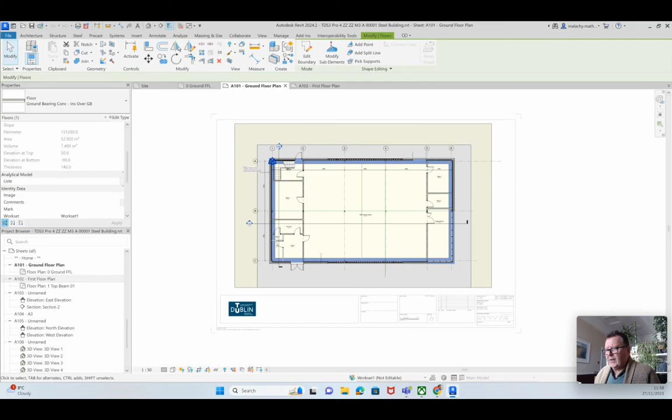Now, you can see I've got strange colors there, so I'm going to activate this view and pick one of my concrete floors and the screed element here. I'm just going to make it white. Right, that stands out a little bit better.

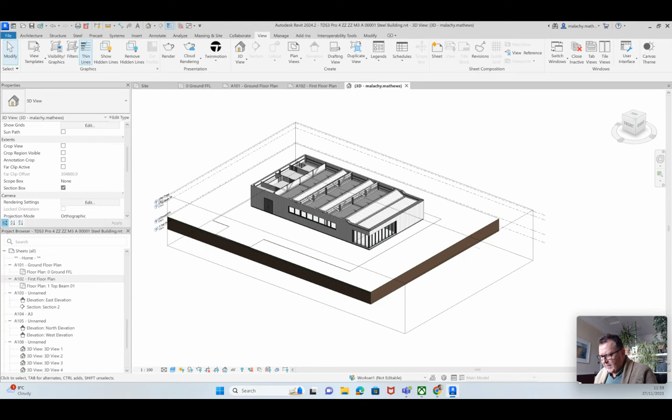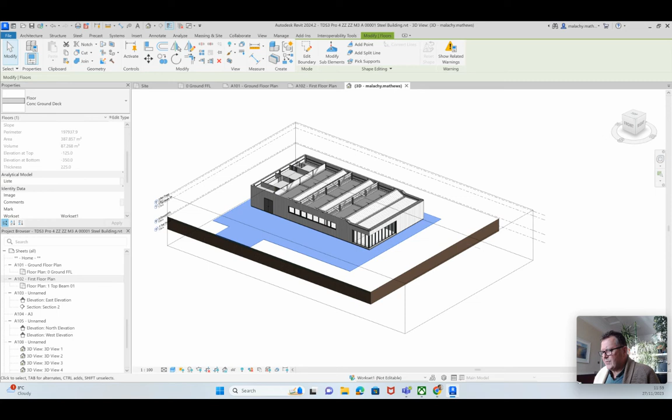If I go into 3D, you'll see that - and I'm not quite sure whether you're getting a site plan or something to work on, so I've just made a very simple topo solid here. When I create my topo solid, I've got 300 grass, 200, and 2 meters of earth below that, and you get something like this. Then this is just literally a ground floor deck, a path and driveway in, just to mark the front entrance. That's the only reason I'm doing that.

So I'm back to my ground floor plan, that's what you're seeing there. Now you'll have this populated with notes and everything else that goes in there. So I'm going to deactivate that view.

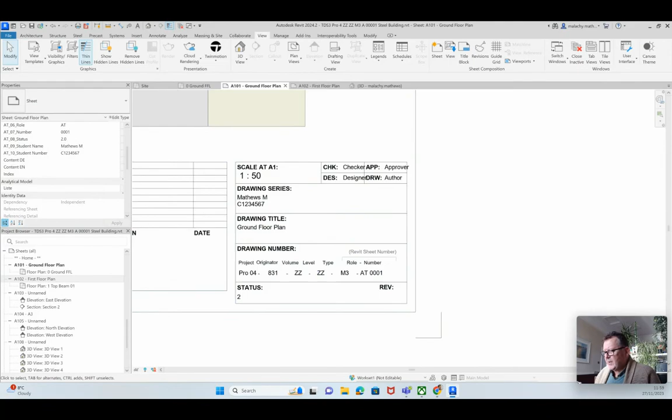Okay, and I'm down to my title block down here. You can see I've got this filled out, and what I'm going to do is go into the ground floor, first floor plan here, and fill this out down here. You don't need to click anything in here - everything you want is filled out via the parameters here.

The advantage is once you do this once, you can just hit the drop-down box and populate these very quickly, because you'll be doing each sheet. So if it's project 4, put in project 4; if it's project 5, put in project 5. 831 is TU 831. ZZ is a standard ISO 19650 designation to say there's only one volume and only one level as such, so I'm just using ZZ.

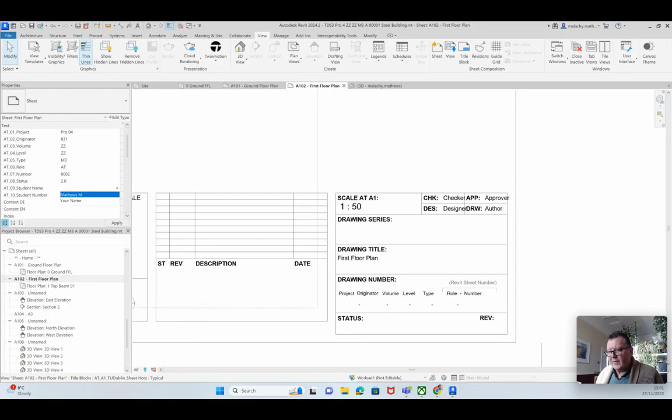M3 is the code for a 3D model. The role is AT. The number in this case is going to be sequential, so this will be number 2. The status is 2. Then you'll fill out your name and student number and hit apply - bang, that's all filled out there for you.

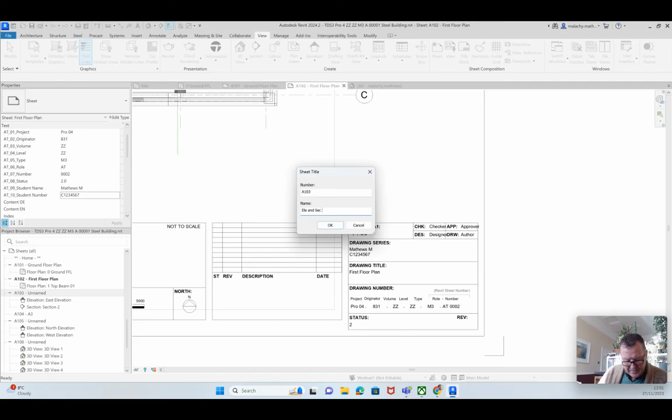So here, if you need to - see this unnamed one there - I'm going to rename that, and that's how I do it. I go in like that, so it's 103, and this is Ele and Sec 2. And then there it is.

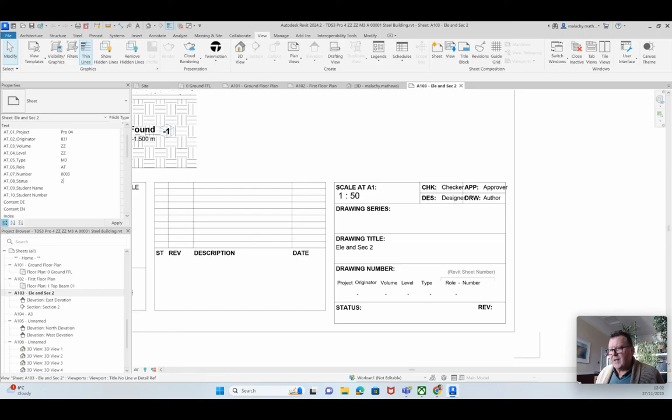If I go into that sheet, you'll see it's named accordingly, and I go through the same process again up here. The only thing that changes, to be honest, is the sequential number. Role is AT, and the number is 03. The status is 2 - that should actually be S2, but we'll just leave it at 2 for the moment. Apply - they're all done there.

Okay, so here's that sheet for you to look at, and I've got the east elevation on a section 2 looking towards the east elevation. Here's my first floor plan - primarily this is what I want to show over here, and that's again at 1:50.

That A3 I don't need, so I'm just going to delete that sheet - it's just an A3 sheet, so we don't need it in our project browser.

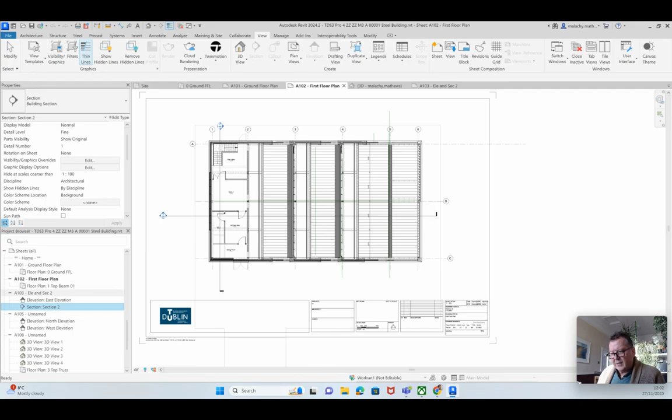I've got the other two - sorry, let's open up that sheet there. There's 2 elevations there, and there's the other elevation and section I've got together as well.

Now, there's a little bit of work still to be done in places like this. So sometimes I show all the elevations together - I thought this worked quite well where I've got the section and the elevation. Gives you quite a good idea of what's what.

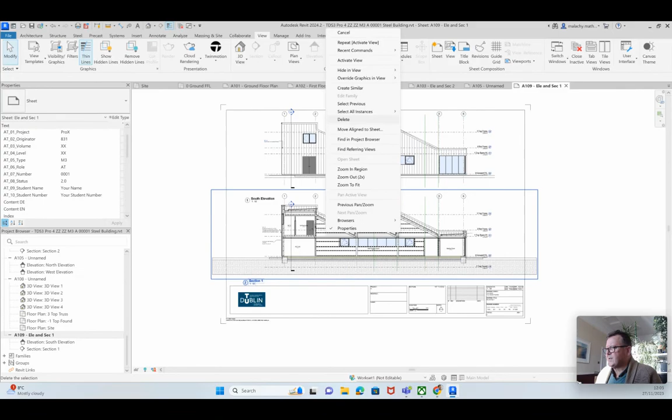You can always go in and activate the view, turn on the crop region, click the X, and that'll take that out of it, then turn off the crop region and deactivate the view. Do something similar here - activate the view, turn on your crop region, hit the X, then turn off. Let's just move that up a little bit there, then turn off that and deactivate the view. Now that one is ready to be done, so fill out the title block down there as well.

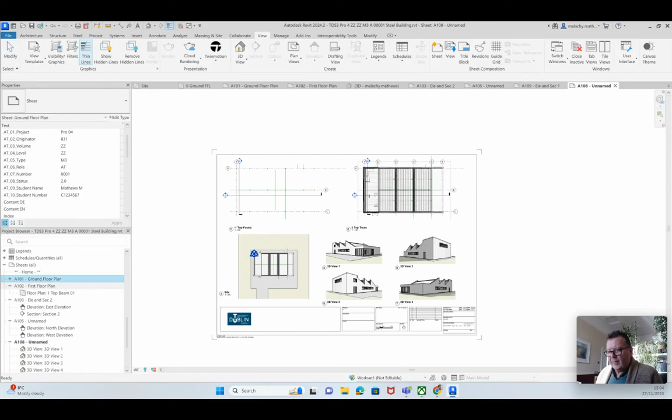Here is another sheet that I've done, and I've got the foundation plan, roof plan. I've got 4 kind of thumbnail camera views and my site plan there. So I'll rearrange the naming here, get those in order, and we'll have our sheets done and ready to go at that stage.